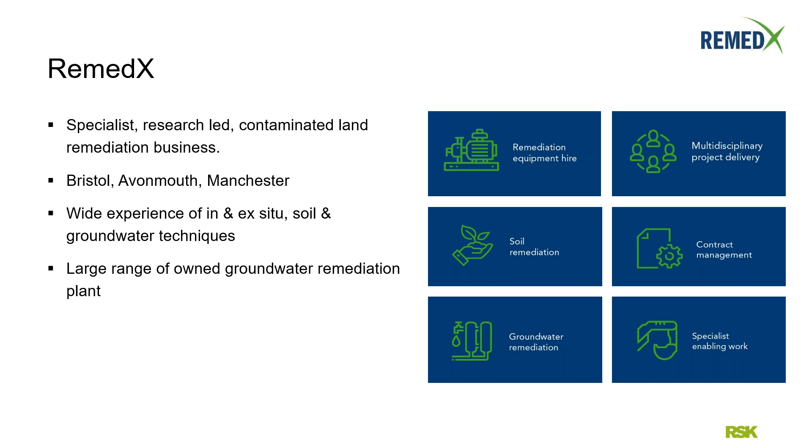Now, just a bit of background on this project. A multinational client with operations all over the UK. The site itself is in the western UK, and the site's been operated for well in excess of 50 years. The focus of the remediation works is the cleanup of EDC, ethylene dichloride, or 1,2-dichloroethane. Although technically there's no actual remediation being undertaken by this contract.

The scope of the contract itself was to effectively introduce the reagent, and slightly confusingly, that reagent is called EHC. So a key distinction to bear in mind as we go through is the acronym of the contaminant EDC versus the acronym of the reagent EHC. Anyway, the reagent will facilitate the remediation by delivering it to the right location and depth within the underlying geology, more of which next.

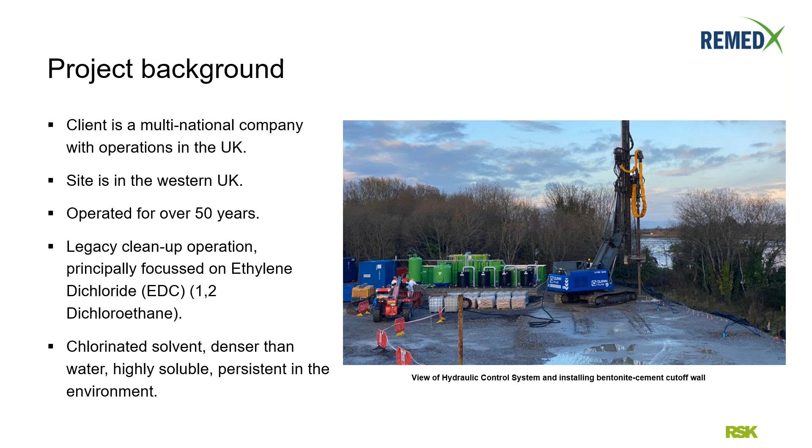But also follow the topography of the geological boundaries and essentially migrate towards the river which bounds the east of the site. And certainly a significant component of the work comprised protecting the river from the accidental mobilization of EDC and indeed co-contaminants towards the river, the mechanism of which I'll discuss in more detail a little later on.

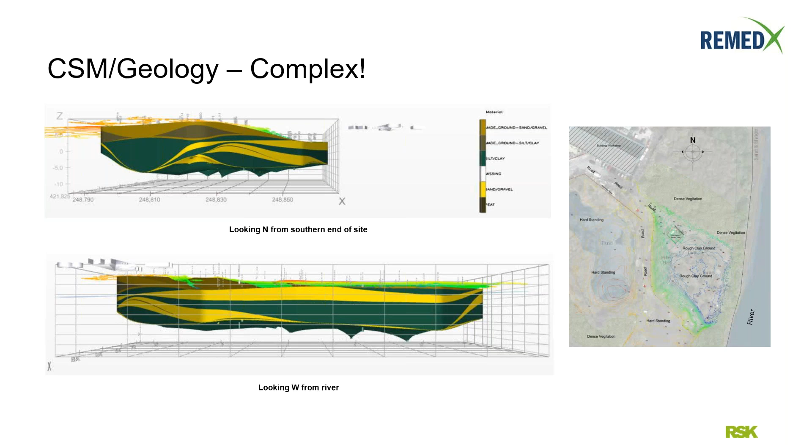So onto the remediation works themselves, or the installation works themselves. The main objective is principally the biological reduction of EDC, it being the most effective treatment mechanism for that specific contaminant. But of course, there'll be other processes and other contaminants that may be present, treated by the works themselves.

Now, the method selected for introducing the reagents into the ground was deep soil mixing, and that was used to get the EHC to the correct depth across the correct impacted thickness in each of the soil mix column locations, each column being 900 mil in diameter and roughly 5 meters deep in the north of the site and a maximum of about 14 in the south. We designed the column spacings, more on which later from Lawrence, based on the EDC concentrations identified by the site investigation works in cells of 100 square meters that we divided the site up into.

And objectively, really, the variable EHC dosage per column was designed to both treat the EDC concentration in situ and beyond, but also to achieve performance criteria, one of the requirements being a representative dose of 1% of the reagent across the entire contaminated mass of soil. And it's important to note that because not the whole soil volume was mixed, we were reliant on a number of other factors to address this criteria, and those factors I'll come on to shortly.

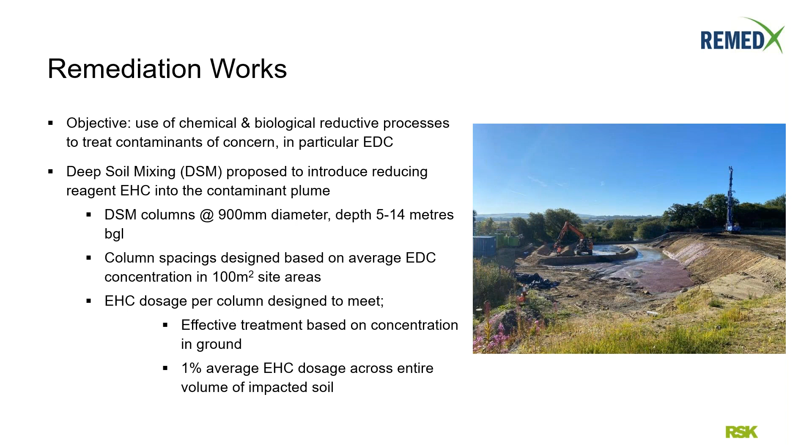So just going back a step towards the protection of the river from upwelling contamination migrating through those high transmissivity sands and gravels, we provided a hydraulic control system comprising the water treatment plant that's pictured on the slide, together with a cement bentonite cutoff wall constructed from, again, 900 mil overlap columns with 3 meter wide gates, for want of a better phrase, at the location of each hydraulic control well. This wall was installed along the whole site boundary with the river, which was about 50 meters or so.

The gates are present to prevent groundwater upwelling post-remediation, which is to say when the systems switch off, given that the wall itself will remain in situ. And they were designed to be bridged in operation by the radius of influence of the hydraulic control pumping wells, based on modeling from pumping tests early in the project.

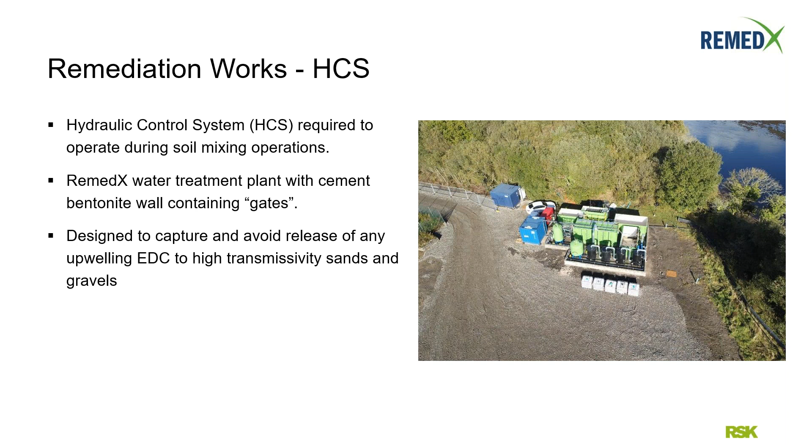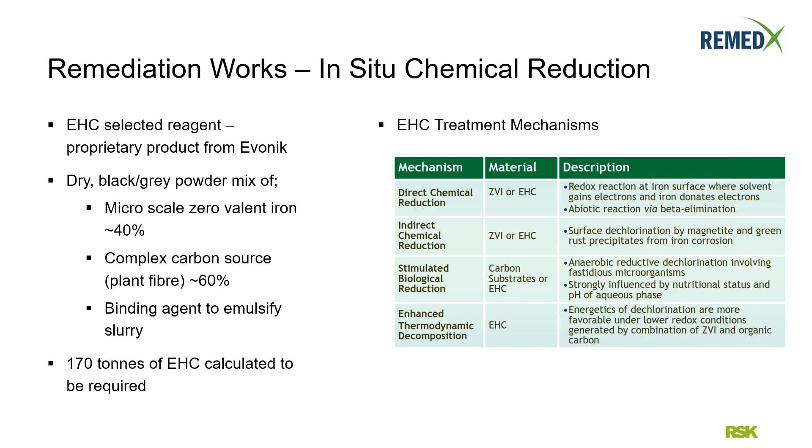And the principal mechanism of treatment we were concerned with here with respect to EDC remediation is the stimulated biological reduction. Inevitably, of course, direct and indirect chemical reduction will take place and the thermodynamic decomposition. But in fairly simple terms, we're looking to the reagent to degrade in situ and create favourable conditions for microbial reduction of EDC. So what we're really leading into now is the physical design of the works, which basically took advantage of this treatment mechanism specifically to drive efficiency of the reagent delivery and efficiency in terms of the overall project cost.

So again, taking advantage of the mechanism of action and the treatment of EHC actually allowed us to vary or flex the column spacings across the site in response to EDC concentration. Originally, the specification for the project called for overlapping columns, which is to say mixing the entire volume on site, which had a high cost, would have been very difficult to implement and essentially inefficient in terms of making the best use of the aforementioned treatment mechanisms of the reagent. So in order to make the project more budget feasible and practically workable, we took advantage of what's referred to as the halo effect. So what is that? What does that mean?

Well, again, put simply, it's a zone of reagent degradation products in the groundwater extending down gradient of the directly mixed soils. And what this functionally means is that you can afford to not mix the whole impacted soil volume, being reliant upon a little time, several weeks in fact, to induce strongly reducing conditions in the aquifer, which effectively bridge the gaps between the mixed soil, the columns themselves, eventually making the entire impacted zone a strongly reducing reactive zone through which groundwater could flow.

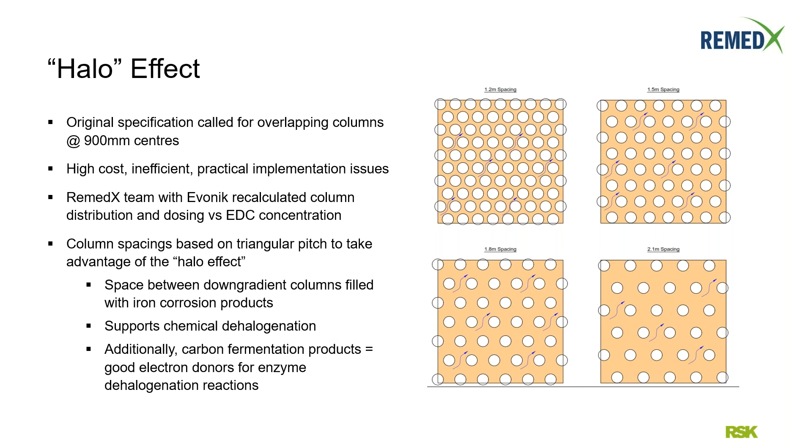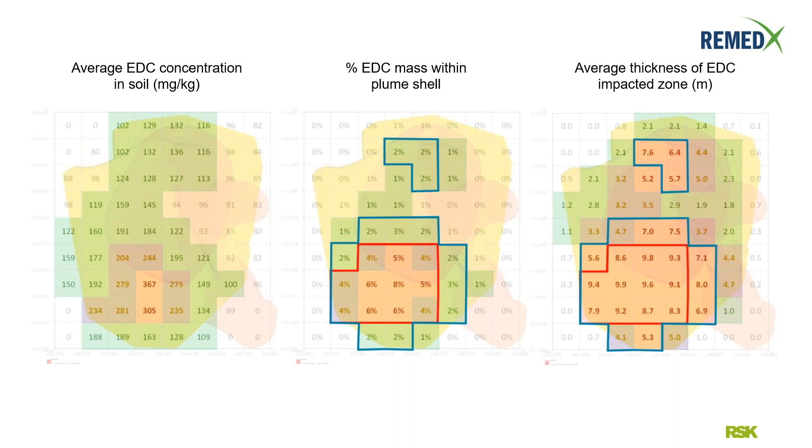It's worth pointing out that the impacted thickness, the diagram on the right-hand side of the slide, is not the depth from the surface, it's the actual impacted thickness that was required to be mixed and co-mixed with EHC. So total mixing depth would be in the order of 14 meters, including overburden for the southern area of the site. So I'll hand over to Lawrence now to talk about the column designs themselves and the technical implementation of the work. Lawrence, thanks.

Thank you, Pete. Yeah, so I'm just going to talk a bit about going from the contamination profile through to an actual column specification to implement, really. So the first box here just shows some of the initial designs in terms of treated volumes of soil. 1B was the original design, which had just over 5,000 cubic meters of soil that needed to be targeted. There was a revision, 1B Rev, that was revised based on additional SI. This significantly increased the amount of impacted volume that needed to be targeted. You can see it also pushed the number of columns required up, and it moved into the realms of being not very cost efficient and practical.

And as such, it necessitated a bit of a revision of the process, moving towards the column spacing and the reliance on the halo effect, which Pete has already discussed. So in the process of this revision, we moved to a variable dosing percentage and a variable column spacing. So in the second table here, the column spacings were varied and the dosing percentages varied based on the soil concentrations, the actual average concentrations in the grids. And based on that, the spacing was derived.

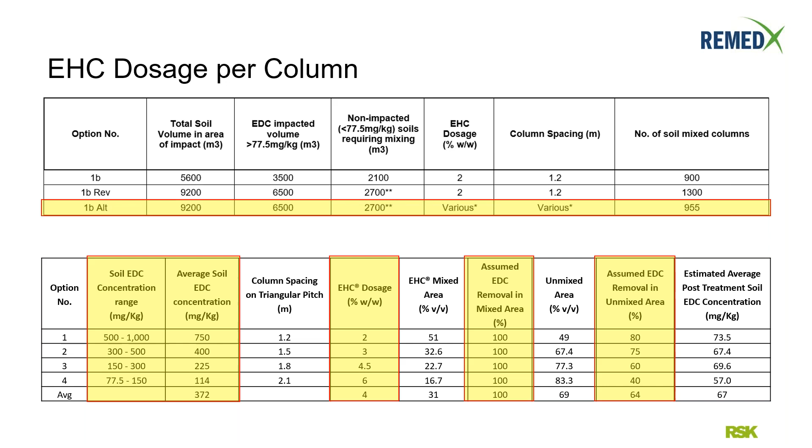So what does this actually mean in terms of an actual final design? This plan just shows what was the actual final derived column schedule for this site. It ended up being 925 columns in total, and you can see that the different colors here correspond to different spacing and dosing percentages that we used.

The light blue being the most spread out and the less contaminated grids, the green being the moderate ones, and in the most contaminated section, the smaller spacing is the orange in the center. There were a few final amendments that were required going from the theoretical schedule to the practical. We had a couple of restrictions on site, as there always are.

Down the left-hand side, due to a newly installed service that was put in by the client, we lost a couple of meters of accessible ground on the western part of the grid, so we had to modify the dosing percentages on that side. You can also see a dark gray voided out section that runs through the center. This was another service, a redundant concrete service that would not have been able to be drilled through, so we had to offset the spacing of columns around that for a couple of meter standoff.

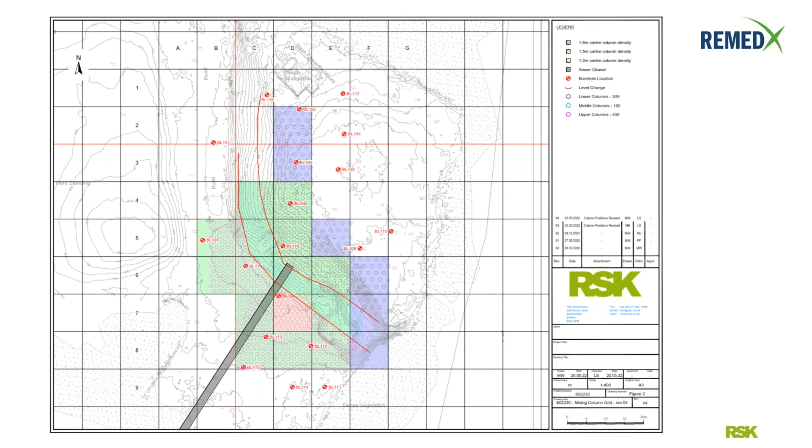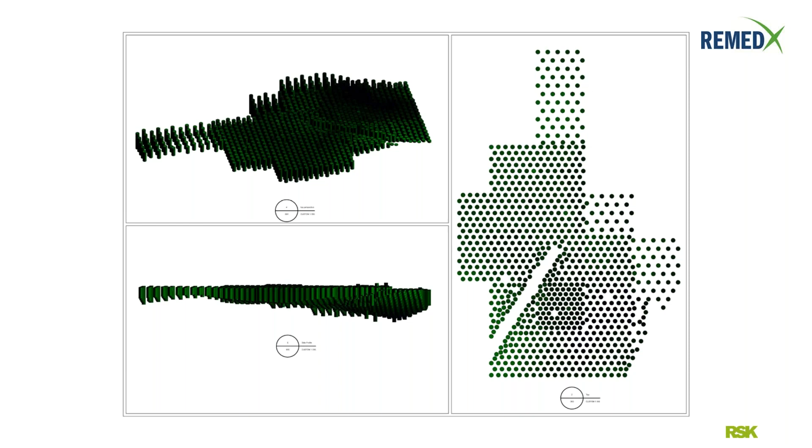So moving on now, this is an actual 3D model of the installed column grid. Where the shading is darker shows where more of the soil mass is targeted, and where it's lighter, there's less. This gives you a feel for the 3D nature and the actual distribution of where the EHC was implanted. And if we move on to the next.

This one shows the same grid, but showing the actual dosing percentage for the columns, and you can quite clearly see the different dosing percentages that were achieved across this grid based on the original EDC concentrations.

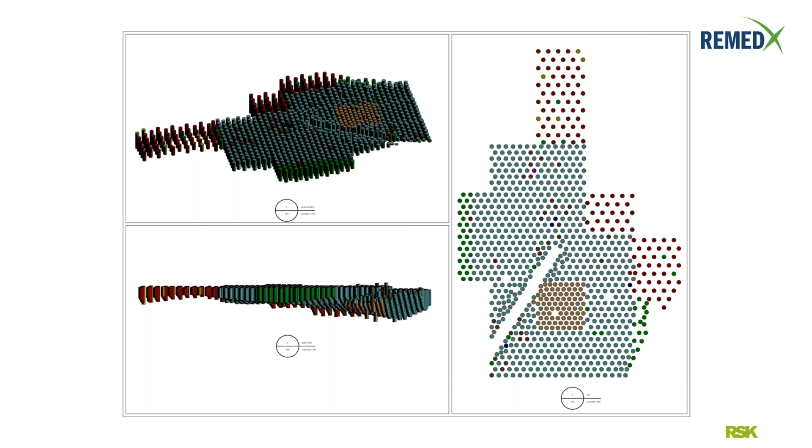Moving on to the process of actually implementing the works, the validation criteria for the works was the implementation of the 4% average EHC across the plume, and therefore it was a quality control exercise to ensure that was achieved. This was done through a few different mechanics during the works. The first one was bench mixing. We did bench mixing trials to determine the best slurry mix percentages to use for this job, as the reagent is slightly different to a standard deep soil mixing bentonite or foundation application. So trials were run to determine workable materials, which then informed the column specification design.

Then during the works, there was a daily process of logging the daily completion to track progress, and a subsequent review of the digital log output. The rig itself has a number of metrics tracked during operation, including rotation speed, how much volume is injected at certain depths, target depths and actual volume of the slurry. So the quality assurance was a case of reviewing these, and over the course of 925 columns, as and when there was the odd mistake or error, it allows you to adjust and correct the schedule to make sure the correct works were delivered.

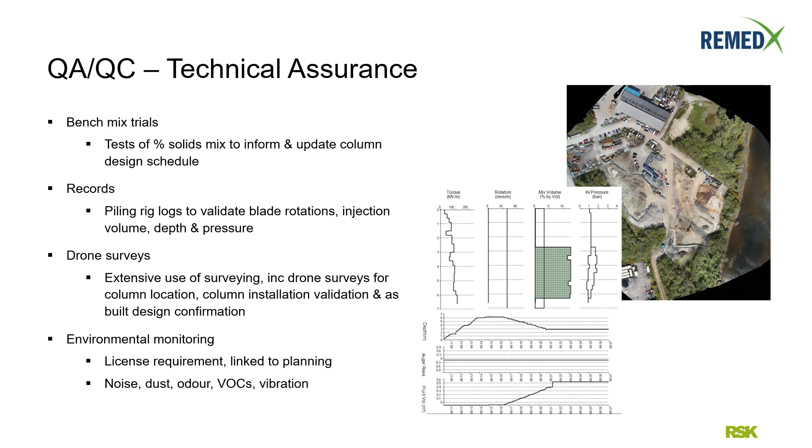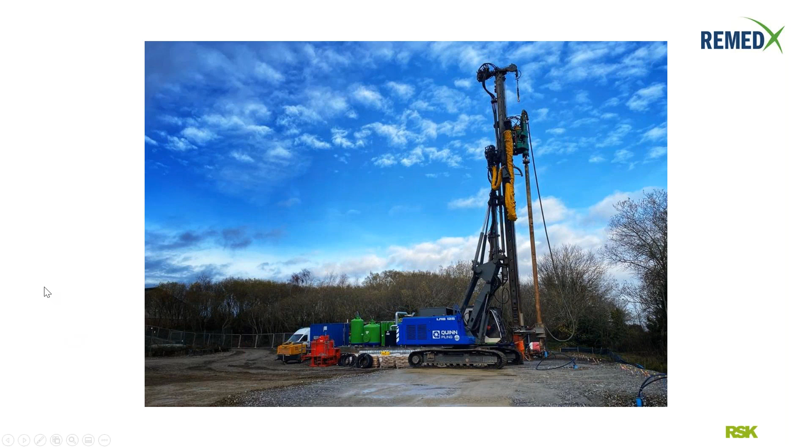The method of installation was basically install one, miss one, install one, miss one, and then going back up the line and reinstalling as the cement bentonite columns cured. The red piece of plant in the middle of the picture is one of the slurry mixers, just for reference.

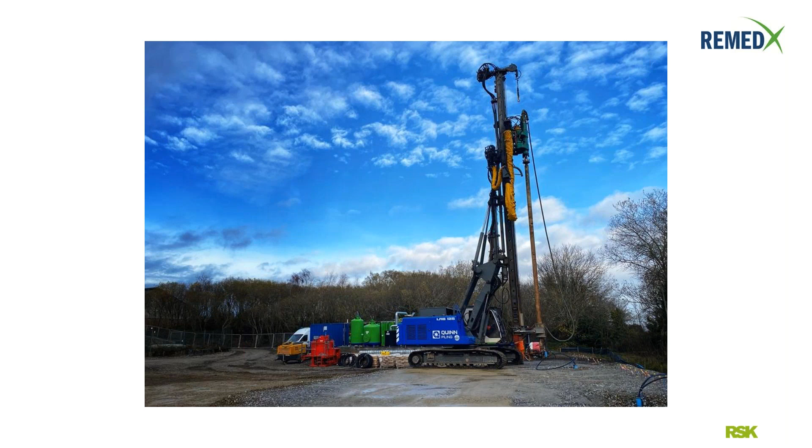This is an image of column number one being installed. It was quite a long haul through various different designs, repricings, and not sure if you're aware of the pandemic, to actually get to this point. So it was a pretty momentous day, to be fair, to actually get column number one in. And again, you can see in the center left of the picture, the telehandler is basically offering a pallet of EHC to the mixer to be mixed into the slurry, which is connected by the pipework to the rig head.

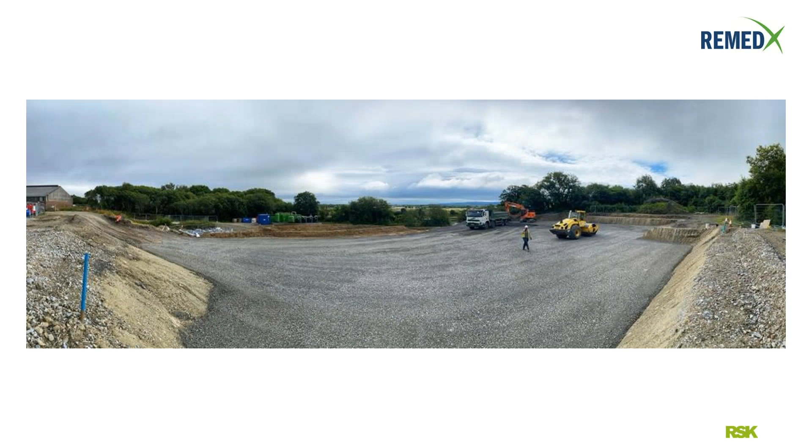So I mentioned at the beginning of the presentation the enabling works aspect. There was quite a significant component of this project that was basically a civil engineering exercise in order to facilitate the remediation works themselves. And it is worth mentioning the huge effort that went into the temporary works design for slope stability reasons, and also the working platform design to make the site safe for the rig to operate on and for the deep soil mixing to be undertaken.

Ground conditions were actually pretty poor, and this is just a good example of our capability in terms of actually undertaking these enabling works, having the flexibility to undertake this sort of operation alongside the traditional work that we do of the technical remediation.

This slide in particular, what I want to really illustrate is something that I don't think anyone had really anticipated at the outset of the project, which is the amount of water consumed by the soil mixing operation, and also the resultant surface slurry that arose from washing out the lines after each location, and a small amount of soil and slurry displacement at the end of each column completion.

What this actually meant in practice is that we ended up having to construct quite a significant slurry management system, particularly on the lower previously mixed part of the site by this stage of the works, which was really to prevent the majority of suspended solids reaching the hydraulic control system and choking the system. The system ended up being more a surface water management control system than an actual hydraulic control system, really, in terms of volume. But this just shows you just how much slurry was running off.

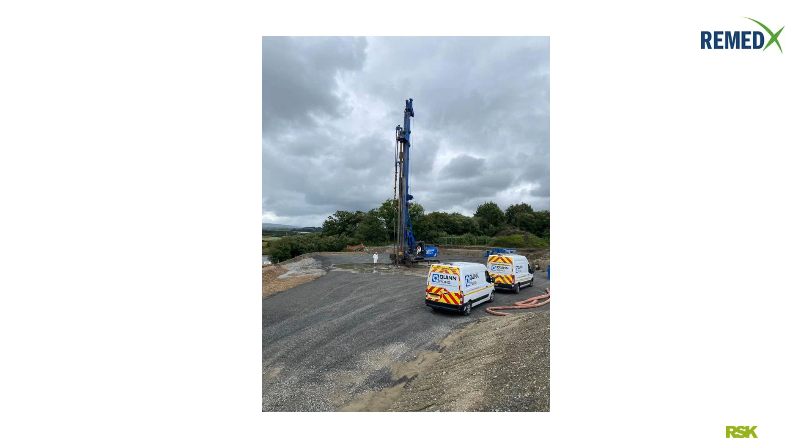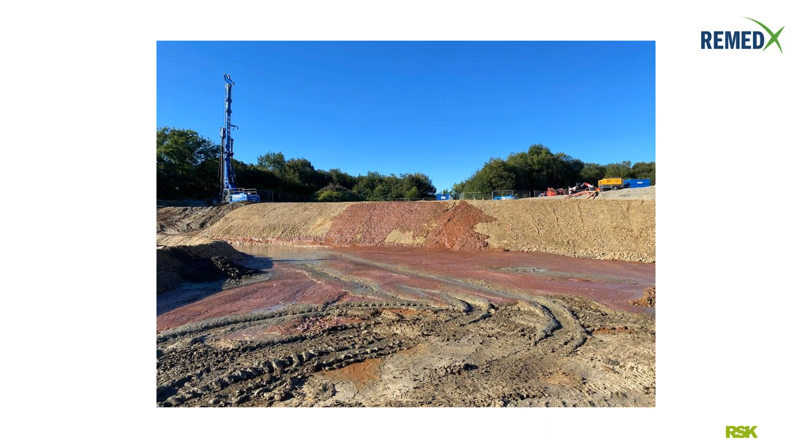This next slide as well, you can see here the clear difference between the soils on site and the red-brown slurry running off the working platform into the management system. Of course, it's the colour it is because of the iron oxidizing rapidly, and although you can't tell from this image, it also has a very strong characteristic organic smell from the carbon fermentation, which happens quite quickly, alongside the stark colour change.

So as Lawrence mentioned, we used drone surveys quite extensively through the job. Just thought I'd throw up some of those images just so that you could see the evolution of the site.

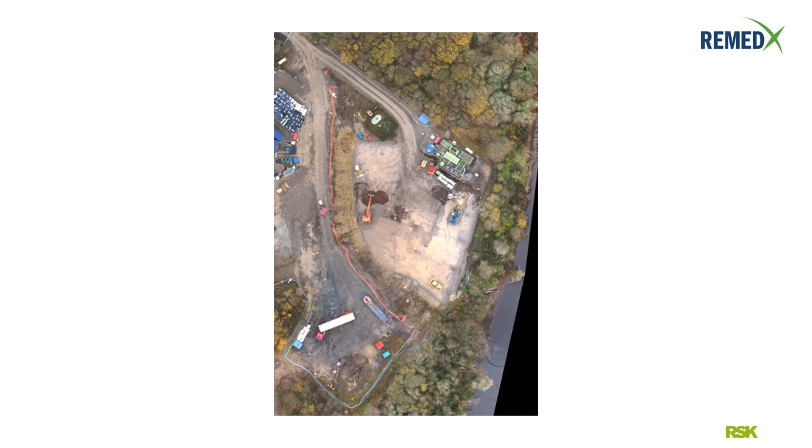And this image is from quite early in the project. You can see the piling rig on the right hand side installing the cut-off wall columns, or preparing to, in fact, and the excavator in the middle there, the orange piece of plant, prepping the initial working platform for final testing. You do get a sense here as well of the actual space constraints on the site. It wasn't the most spacious site in the world to work on.

And we're part way through installation here. You can see the installed columns as the sort of brown circular dots on the ground by the roller, the yellow piece of plant in the center of the site, and the red-brown slurry stockpile there by the HCS, which was all of the slurry that was gathered up from phase one of the column installations.

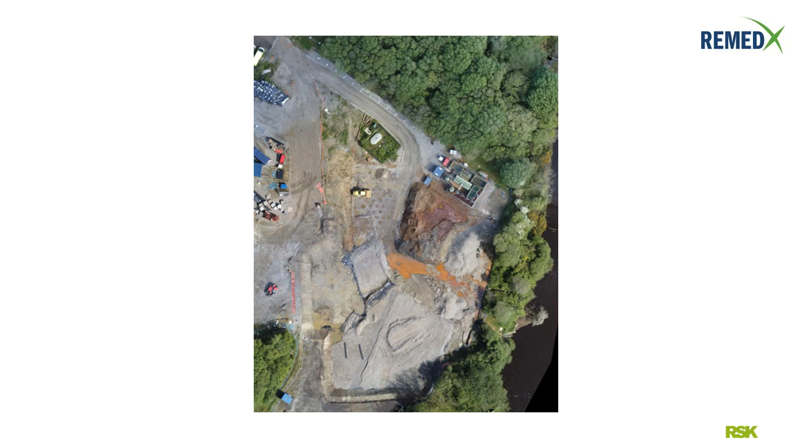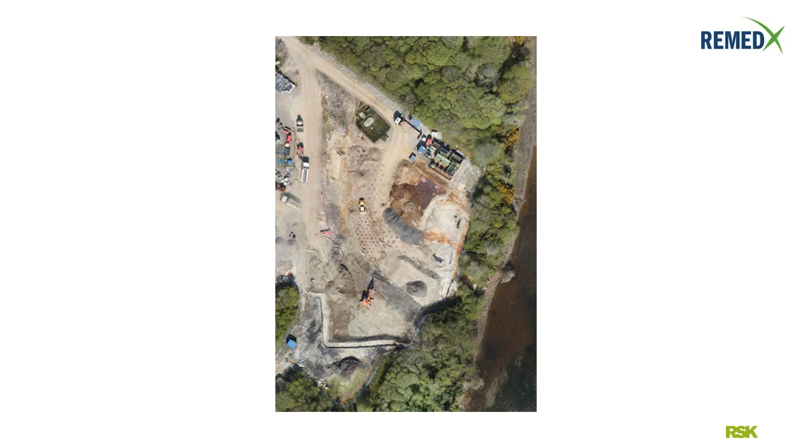We're prepping the second working platform here, but you get a clearer sense of the density of the column installation, again from the dots that you can see on the ground, particularly there immediately to the south of the roller.

And here we are at the tail end of the column installation program, with the piling rig working across the southern area of the site, and a clear presence of the slurry I mentioned at the surface, both on top of the working platform and running along a drain that we excavated across the southern site boundary there, just beyond the piling rig, which runs down towards where the excavator is in the middle right of the image.

The grey slurry that the excavator's in is fresh, unoxidized slurry being managed through the management system, with the resultant solids eventually being excavated out and placed in the slurry lagoon, which is very obviously the red-brown area in the rough center top of the image there. Water then drained around through a series of bunded areas to a silt trench along the other side of the cut-off wall, and the water then pumped into the HCS, treated and discharged.